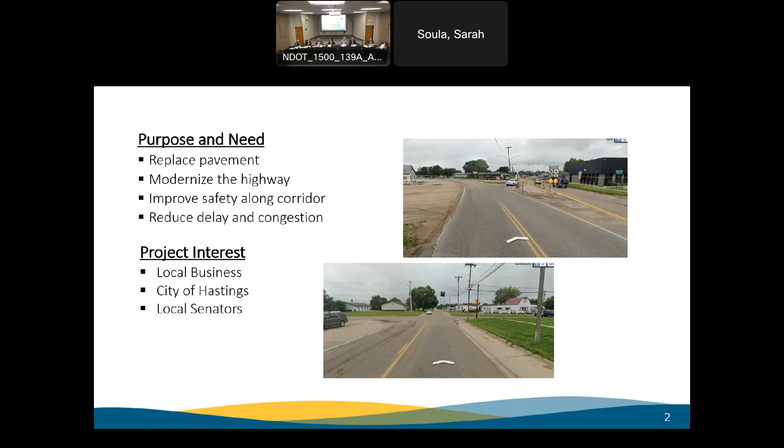So as we step into this, some of the key activities I want to talk about that have occurred recently is a public meeting. I start off with this because that's our biggest step that we've done here as of late. It's taken us a little bit to get to this because we did have to take a step back in the design and in working with the city. Since it is a first-class city in nature, that means there are over 5,000 people who live in Hastings.

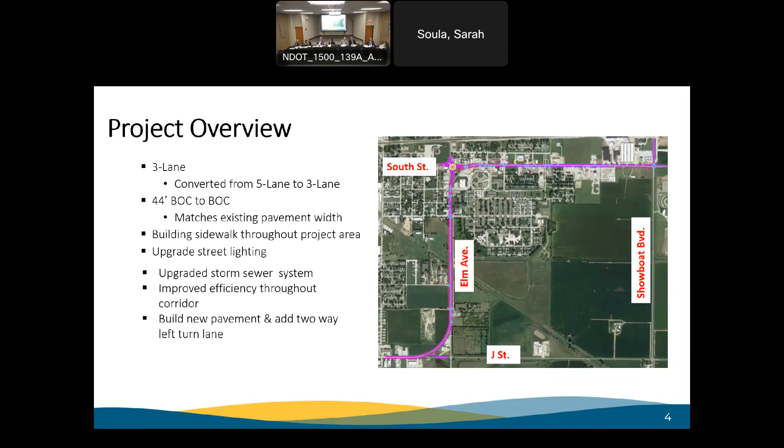There is a Good Samaritan community there that is assisted living for the elderly. That community was very interested in the public facilities along this corridor. Currently, there are very minimal sidewalks along this segment of Highway 6. This project will build continuous sidewalks for them. In my conversations with them personally, we had quite a few of them show up at the public hearing, and just understanding that we'll have sidewalks and curb ramps, and that they have this curb section along with this buffer zone, was very reassuring to them for their mobility. Driving through the project, they are a very mobile community.

You'll see them crossing and moving about, and so this is important for them to have access. It was a very good key thing that they learned about and were able to reach back and understand that with us.

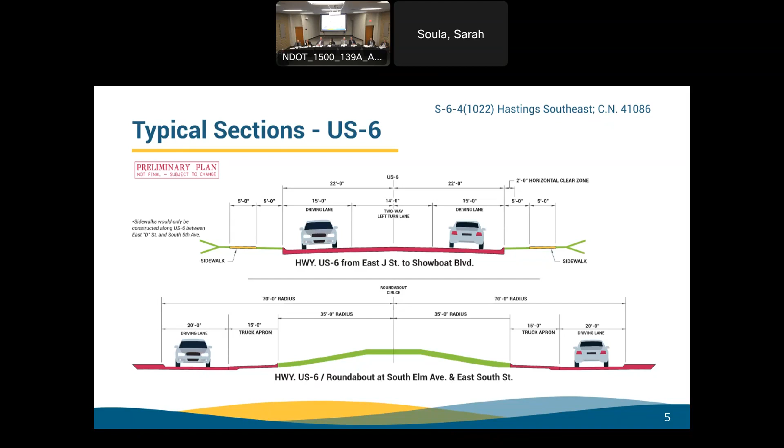Traffic-wise, part of our evaluation going from a 5-lane to a 3-lane was traffic analysis, to make sure we're meeting the needs and operation of the future. Traffic in this area is projected to be very steady, with some exceptions to the east half of the project. Outside, we do have some industrial growth going on that shows vehicles will continue to slightly increase over the next 20 years.

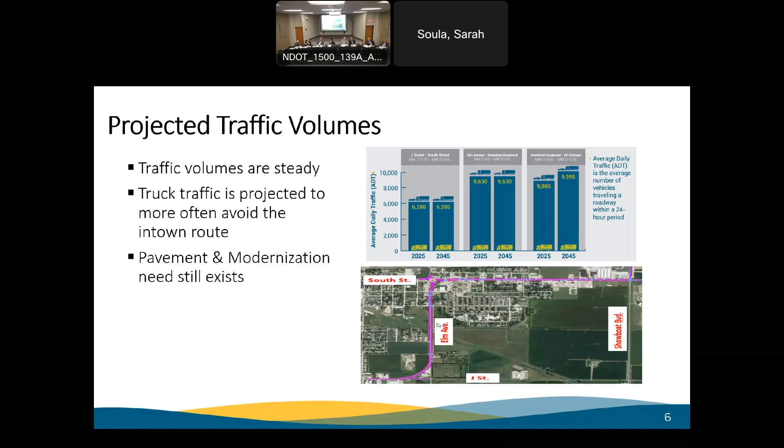That truck traffic is anticipated to utilize Showboat Boulevard and Showboat North. As far as the project itself, we still need to move forward with it to make sure we are meeting and modernizing the sections and the pavement. So we still have that driving need to do this, even though traffic is steady.

The city and the state also participated in funding to improve that section. We are slated to use it, like I said, as a detour, but there's a lot of conversation about trying to get trucks over to this on a permanent basis. Right now, since it's a county road, we're making our facility access for trucks easy and fluid, and we'll talk about some scenarios why that is. But right now we don't require trucks to use it because it's not a state facility, so we still design Highway 6 to meet all the trucking and traffic needs.

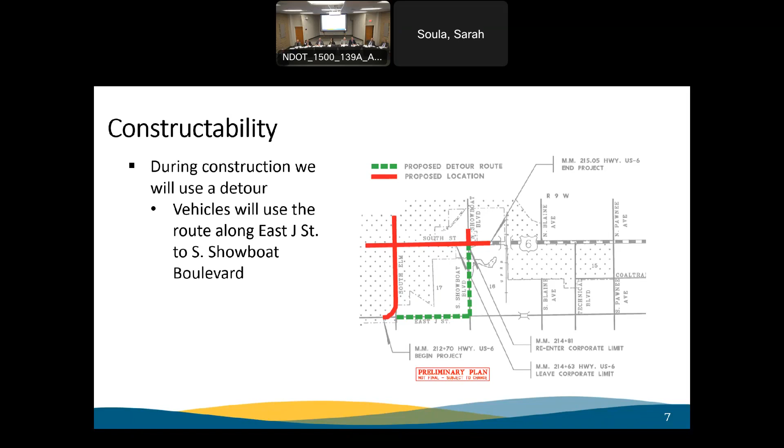So we would move the intersection back over to more of a traditional location where you see it today. In first analysis, with a standard T intersection like you'd normally see in a roadway, the functionality became a little less operational once we went from the 5-lane to a 3-lane. That's because all the through movement of Highway 6 has to turn and go left or right, depending on which movement they're making, and that turning movement poses a lot of phasing obstacles for green lights and red lights, so traffic pauses for a considerable amount of time.

With a roundabout, we get the efficiency to not only slow the traffic but have a more continuous and efficient movement. It also provides safety aspects the public was interested in, like refuge for pedestrians within those medians. This configuration is much less than dual turn lanes, so the footprint is smaller. We were able to shift it towards the southwest, away from the Duncan ball field, which is very important to the community, so we are limiting impacts to the ball field itself, essentially avoiding them entirely.

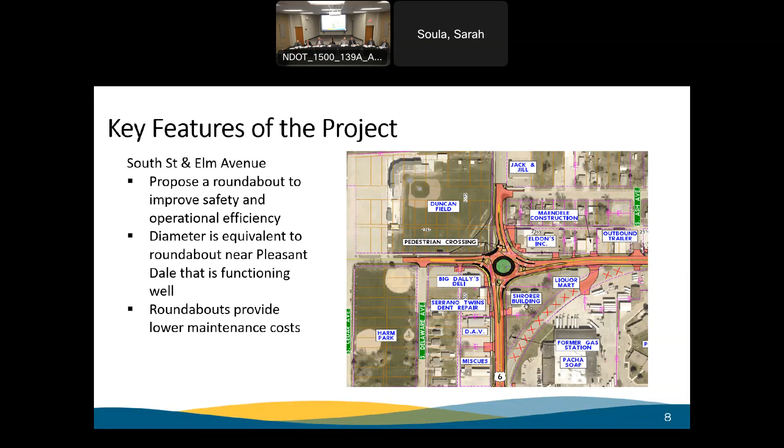So if you add the efficiency that they give plus the safety benefit, they are great tools for us to use at certain locations.

We also wanted to let them know that this isn't our first one, and everybody knows that. Some people are not familiar with them. Part of this is educating people on these, giving them a chance to go drive them across the state themselves versus just hearing about them. This one happens to be right outside of Lincoln at Pleasant Dale. It does handle large trucks as they move through it. And so we kind of referenced this for them, but then we also referenced several others throughout the state so that they would understand what occurs during this movement.

And as we showed this to them, obviously a lot of people paid a lot of attention to it. We have a lot of industry in that area that drives trucks, and so they are interested in how they function, just like every other community.

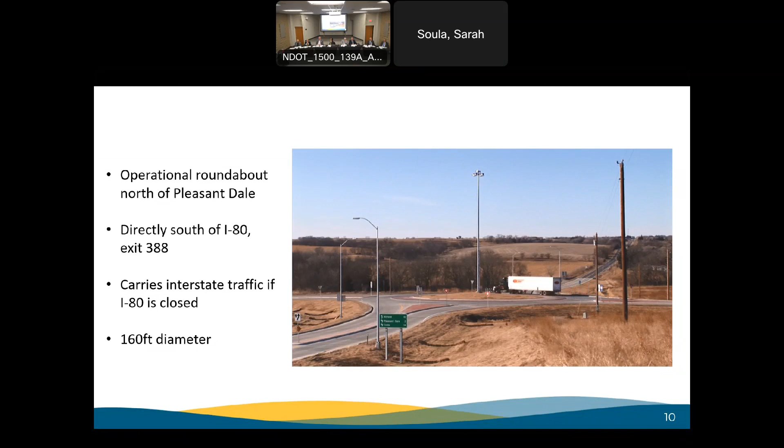We provided them with this, which showed them also those other locations throughout the state. So we have more than this out there currently, but this was some of them that we built over the last 15 plus years. And so we have some historical data that we wanted to share with them.

I'll take you to the right side of the slide where we talk about the crashes. In general, what you're seeing there is some pretty significant impacts to those areas. These roundabouts were put in not only for operational needs, but also for safety. If you look at the total crashes over the last 3 years and you tally up the before and after, you're seeing about a 50% decrease... instead of that national level of 35%, for these locations we're seeing about a 50% decrease in total accidents and about an 80% decrease in serious injury accidents. And so that's a great benefit to all of us.

And so again, this is just a chance for them to understand why we need these out there and why we think that this is the best, most efficient, safe use of that intersection in Hastings.

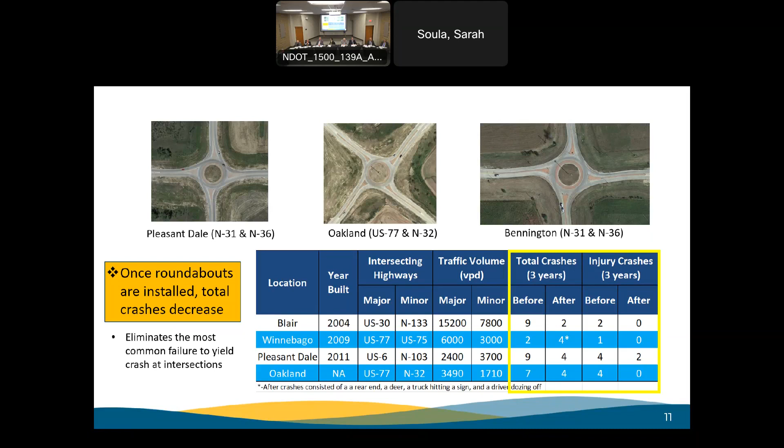The other part of the conversation where we talk about with the city and the community, there is a group within the community, Hastings with a Voice. They had reached out to us a couple times to talk about first the concern of the roundabout that we just got done discussing, and then second with obviously this intersection that's shown in red.

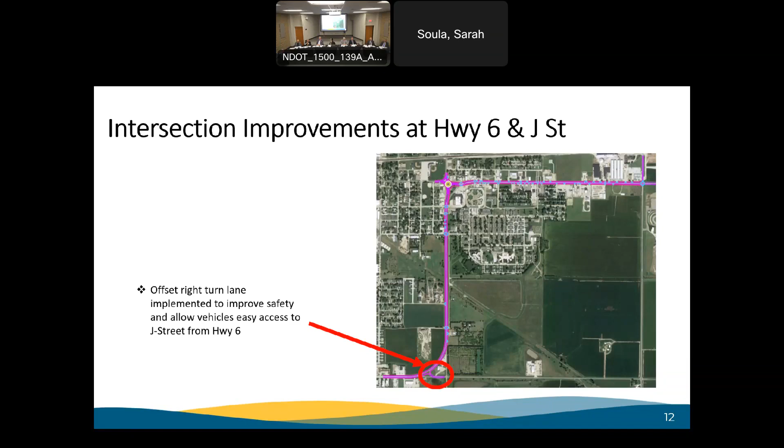Those two conversations have evolved over the last year. From my opinion, I believe the concern with the roundabout that is there currently, they have an understanding of that and are accepting of that. A lot of their questions now are saying, should we build a roundabout down in the southeast corner or southwest corner where the red dot is now too? So we have analyzed that, and we want to step into that more as far as looking at what we are doing there now and what we believe is the most efficient use of city funds, state funds, keeping this safe and operational.

So currently what you're seeing is that in this particular intersection, it's slightly different than what we're seeing up north. Here, the through movement doesn't have to have a right turn or a left turn like up on the north intersection. Here, the through traffic has the ability to maintain a steady flow, so we don't have that operational turning movement that would cause a lot of delay. Here we have basically a J Street connection that we are moving over to be more centralized with the curve so we have better sight distance.

We are currently proposing a transition out of that 5-lane into a 3-lane, utilizing the outside lane as a free turn movement for trucks and others to get onto J Street. We are providing then coming south with that 3-lane, a turning movement to come onto it from the north approach. The movement that is the conversation is the trucks coming around and having to get over onto Highway 6.

Traffic has continued to analyze this, and we continue to in the future as well. With what we see projected and what we've seen today, right now by putting in a signal, we would actually add delay. Trucks right now have the ability to come up, stop, go. Adding a signal would cause them to stop if they had a red and wait through that signal. So again, from an efficiency standpoint, it is operational very well today. This will be even a better operation.

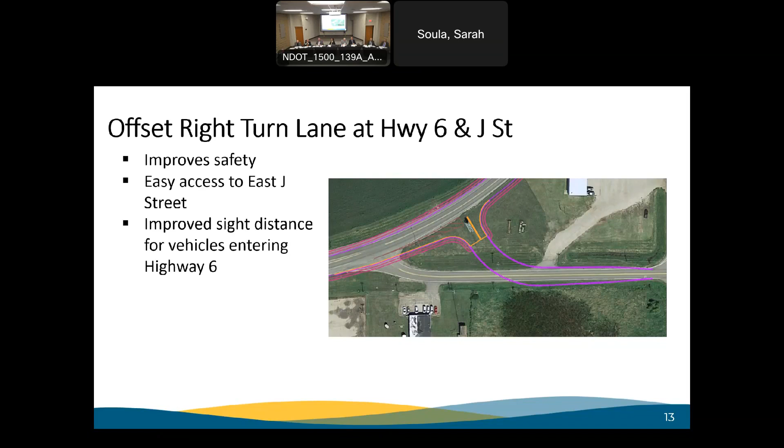So the conclusion of what we presented to them was really just the overall implementation, the safety, efficiency of the roundabout, and why we need it at some locations and other locations we don't.

I believe we had a very successful public meeting. I believe we've had good positive support over it. The city's here today, so I believe we have good city support for it. Again, we are addressing the safety concerns, the modernization of this area, and we're improving the ability for the trucks to not only utilize our facility, but also to utilize the East J Street facility as well. We are excited to get this out the door, and I believe the city's excited for it. I believe that all the public is excited for it to come. It's been a while since we've had the opportunity to say we're getting close.

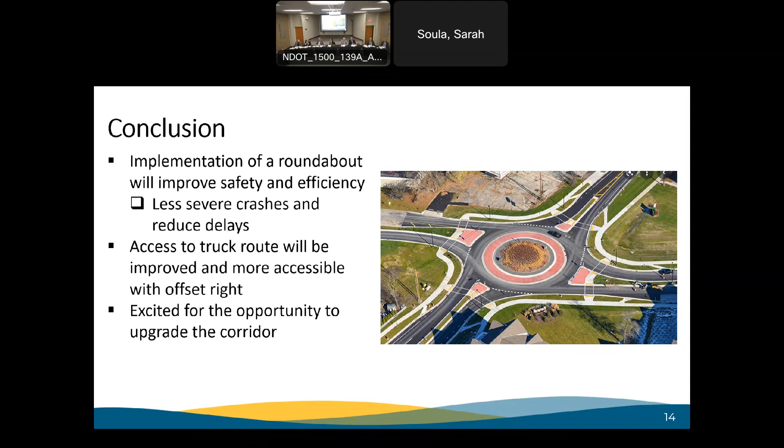So what does that mean? The reason I'm here today is not only to update you, but we did come here in 2017 to ask for corridor protection or access control. As we do access control along a project, we're consolidating driveways. So we basically have safer movements where driveways are lined up versus where we have people coming and entering at more of a free will.

We did that back in 2017. The commission did grant that. So we've moved forward with the design on that. Reviewing what we did back in 17, the resolution that we received from the commission appears to cover the same as we have today, other than the fact that we have a 3-lane section versus a 5-lane. So we don't believe we need any action from the commission at this time.

And so we were hanging on to this and wanted to represent that we had brought that to the board already a few years back.

Our timeline: right now we had that public meeting in July of 23. Design is now progressing and will continue all the way up to the point where we let it. Our right-of-way efforts will begin hopefully next spring.

There are a lot of right-of-way acquisitions and impacts along the project, but those are somewhat minor compared to others. We have a lot of sidewalk to build, and acquisition of access control, so as part of the right-of-way item we'll be dealing with everybody along this corridor, which takes time. That right-of-way acquisition will carry us into basically the fall of 25.

That fall of 25 is when we anticipate the letting of the project, and the main construction will then begin in the spring of 26. In that period from letting in fall 25 to that spring, there could be some other activities occurring, such as utilities.

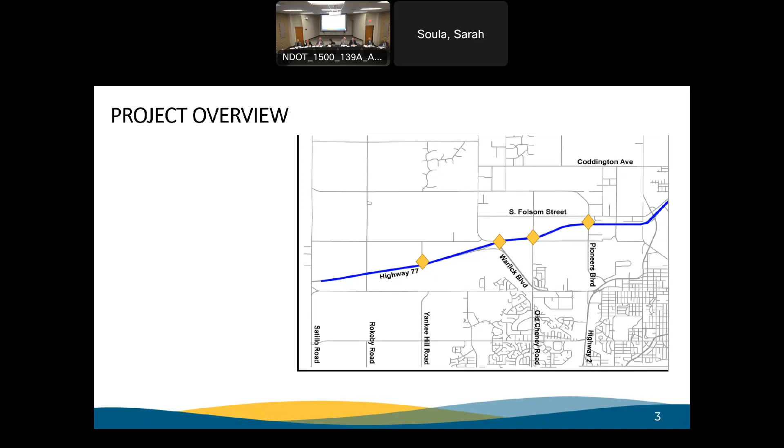So the 4 intersections on this segment are: one, the simple one is Yankee Hill - today it's just a T at-grade, and that will be closed, similar to what we've done on Rokeby. But the 3 major ones - Warlick, Old Cheney, and Pioneer - those signals will be removed. My next slide is going to talk about what we're going to do there.

Now, we don't have the right geometrics for you to look at because we're still in kind of a concept phase. We hope to have concepts done here soon and vetted, but in a very high altitude sense, we have the no-build option, which is our baseline.

That's what's out there today, three signalized intersections. And then four other alternatives that we're considering hard. Of those four, we're going to have an interchange at Warlick for sure. That's a commitment we've made.

So there will be an interchange at Warlick and 77. We've got some development in that area with the new casino, it's been upgraded. City of Lincoln is also doing major infrastructure work at 14th and Old Cheney that will impact this location.

Then when we start talking about Old Cheney and Pioneer, we have a range of options, kind of a bucket list, a what-if-then statement. Right now, we have an existing NEPA document, and it describes option 2.

So that's where we'd really like to start: an interchange at Warlick, an interchange at Pioneer, and then a full closure of Old Cheney with roundabouts. So you would have no direct access to 77, and you'd have no way to get over 77. It would be closed.

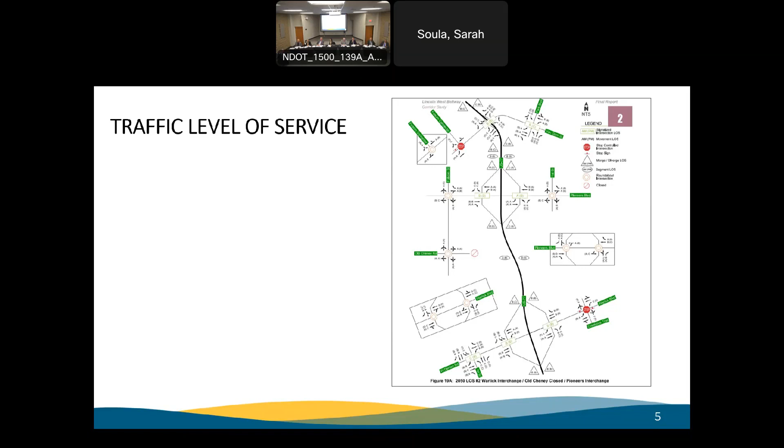Our next steps: the corridor study has been completed. Why I'm not showing you any of these concepts is they're really in progress right now. We just restarted this job here in '23 with new signed contracts with our consulting partners, and really wanted to get South Beltway tidied up before we put a lot of focus on West. So we're dusting off a lot of information. Hope to have that range of alternatives to us here in the next month.

On that, what we want to do is take the outcomes and look at the operations, look at the environmental impacts. That's going to be a big step on knowing what are we doing to our environment, our agency partners, to help us make a decision on where to go. And then obviously cost is going to be a factor. Put that all into a matrix, probably a weighted matrix.

Arrive at some proposals that we feel comfortable enough to take out to the public, in a re-kickoff meeting, but also with enough homework that we can articulate what we think a preferred solution is, but not far enough that we can't absorb and listen to comments and adapt to community comments.

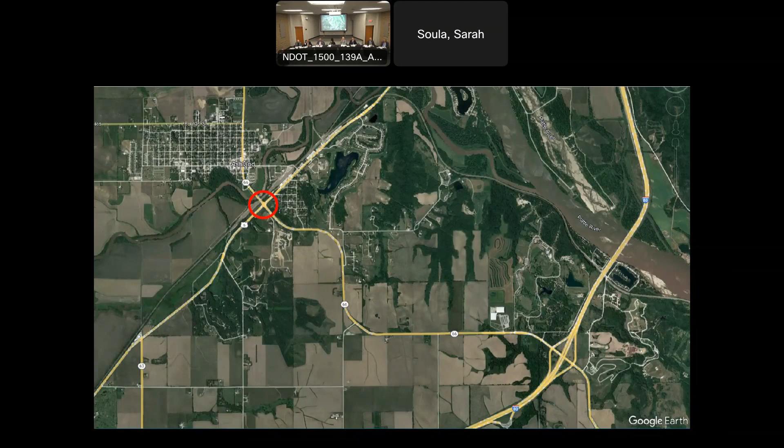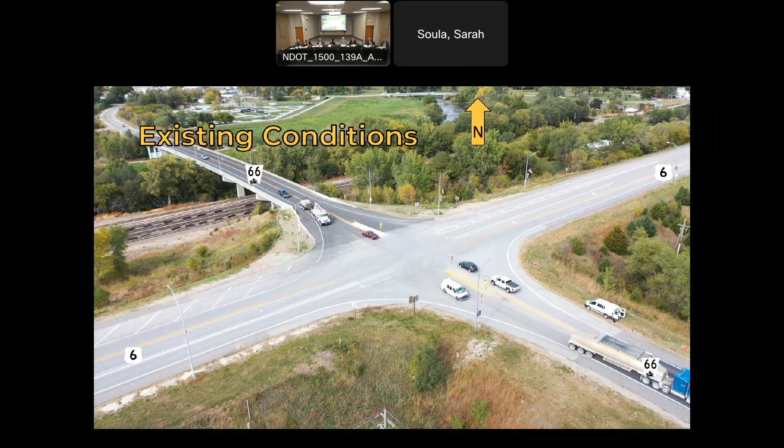Existing conditions in Ashland: Highway 66 is stop controlled. Ashland is up to the north there. It's a pretty wide intersection, which helped us out with this project.

A little background on this intersection: in 2006, Highway 66 was rerouted from the south to construct a 4-way intersection here. Prior to that, Highway 66 snaked through town to create another T intersection a little farther to the east. In 2019, from March to July, we had a temporary traffic signal in service here because of increased traffic detour routes from the floods in the spring of 2019. And in 2021, we proposed a modular roundabout to the city.

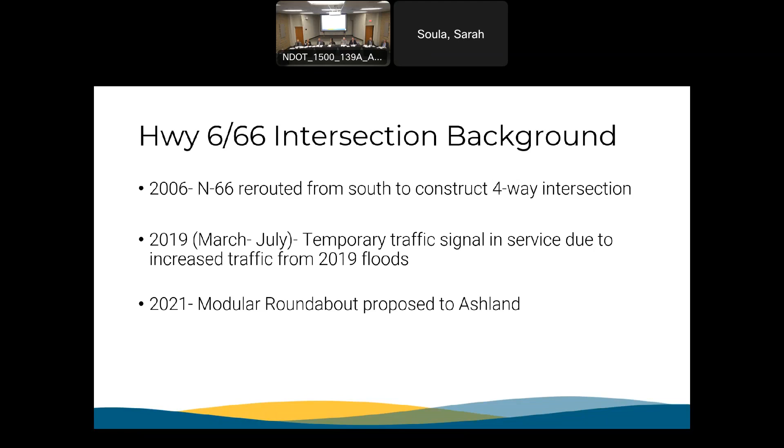Some other additional information on this intersection: because of traffic volumes on Highway 6 and the access points to town, we saw some operational issues from people trying to leave town, and there were safety concerns with some right angle crashes at this intersection. So our task was, can we install a roundabout here using temporary traffic control devices?

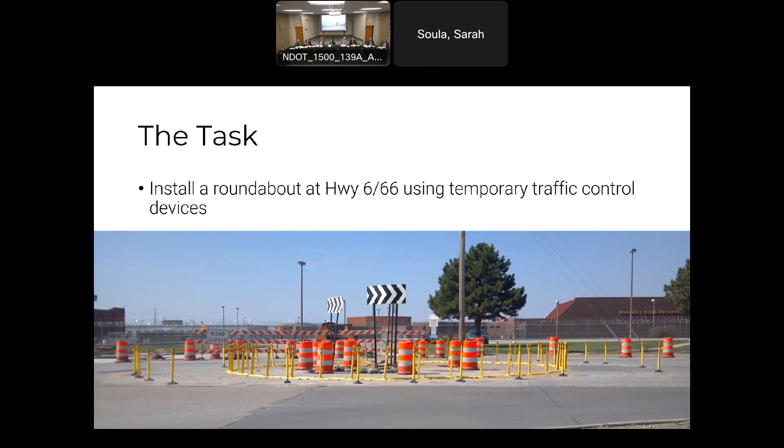This picture is from 2012, just south of our office at 14th Street and Pioneers. There was a reconstruction project down there, and a temporary roundabout was built to control traffic through the intersection and help with the phasing of construction to the south. This was our first look at this. It functioned really well through this project, but we didn't feel these devices would hold up for the period of time we were potentially looking for. A couple months during a project when a contractor is on site every day is one thing, but we didn't think this would really function for a longer term.

So we started looking at other options. What else is out there? What else can we build this roundabout with? Most of these were eliminated just because they couldn't do what we wanted, purely because of size. These three here would work if you want to build a little mini roundabout for a neighborhood, but for the size we were looking at, they were essentially eliminated.

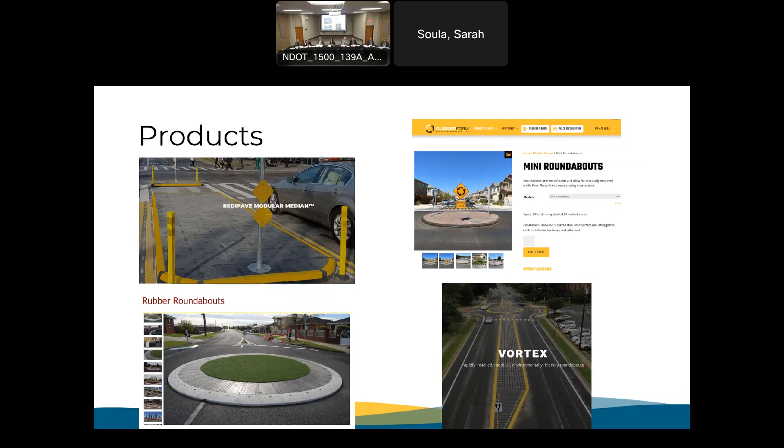The one product we did go with was this Vortex design in the bottom right corner. They had the flexibility with their product design that was going to allow us to do what we were looking at doing. Working through that process with the company, we came up with an original concept just to see if this was going to fit in the intersection - is it big enough that we can do this without a lot of widening or grading, something that wouldn't get us into a lot of permit issues with building this here.

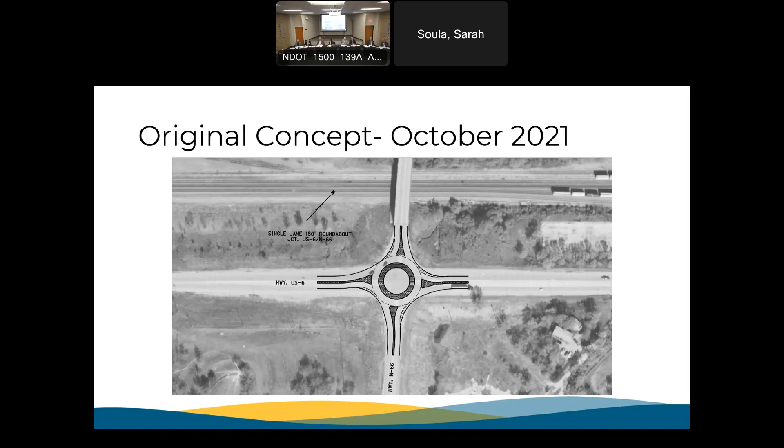As a common theme this morning, this is essentially the roundabout that's at Pleasant Dale. The Pleasantdale roundabout is used a lot for us because it has truck traffic, as Mick mentioned, and we know it works. So this is something we can take to the community and say, we know this is going to work because it works right here, at a similar size.

For community engagement, in October of 2021 we met with a few city officials from Ashland just to introduce this topic. They've brought this intersection to our attention several times, and we wanted to see their thoughts before going any farther. That meeting went well, so we went to the city council in November of 2021. One thing we asked them for at that meeting was a resolution supporting this project, because for us to go farther, we wanted a good feeling that they were going to support us with this.

So that led to what we called the Ashland Pilot Project. This project was let in August of '22. We gave this project 45 working days. And that was important with anything we did here.

Over the last 10 years, we've been in and around Ashland several times on Highway 6, on 66 through town. They had a project on Silver Street. There's been a lot of action in Ashland. We didn't want to do anything that was going to close something again just in this short amount of time. So 45 working days, pretty quick project that we could get in and get out.

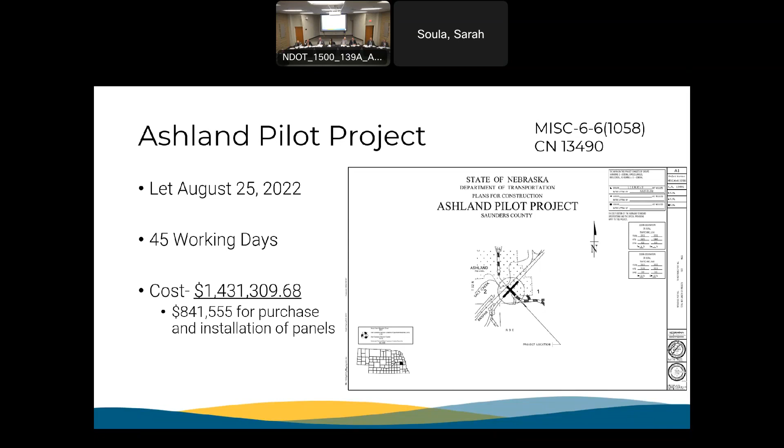This is a design that went into the plans. As you can see from here, it's essentially what we had in that original concept, with a few minor tweaks. This project was designed like we would design any other roundabout. We had the same considerations: how are vehicles getting in, turning movements, what speeds are these curves designed for, really similar to anything we would build out of concrete.

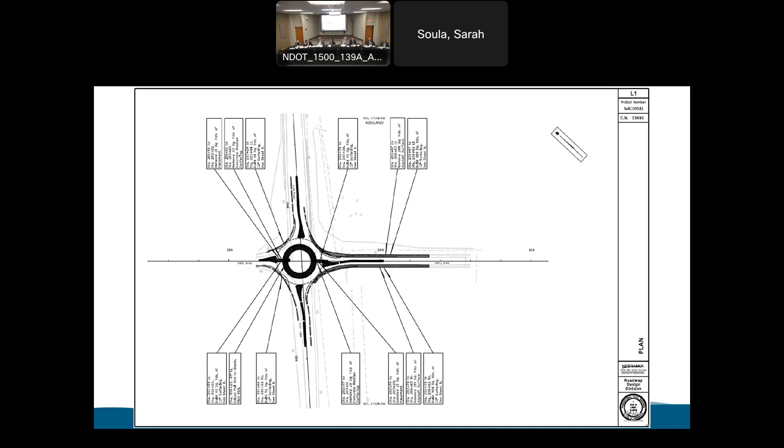So in the middle of June this year, these panels showed up on the project site. The really interesting thing with this vendor is they start with a panel that's 14 to 16 feet long. They're a foot wide and about 2.5 to 3 inches thick. The material is the same material that the railroad uses right now for their railroad ties. So it's a composite material, with about a 50-year design life to it.

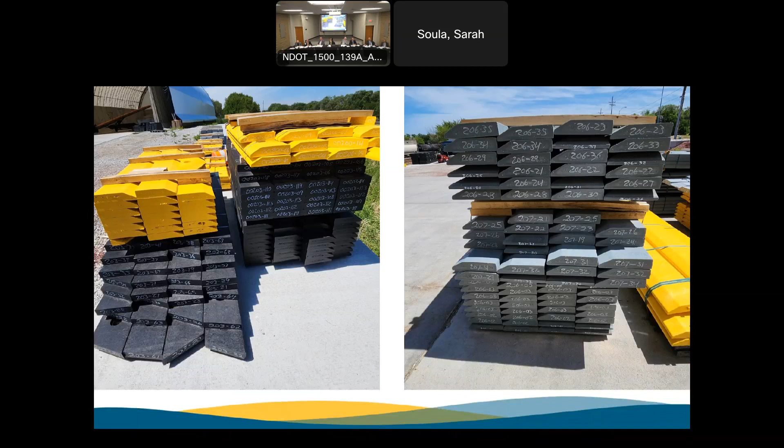But these panels all come on pallets. They're all individually numbered, and it's like putting together a puzzle. You can see on the end here, every piece has a unique number, and that has one spot in that roundabout where this is going to go. There's no cutting on site, no drilling of holes. You find the pallet these are on and start laying them out. The pallets are all set out, so you're not going through 20 pallets to find your one panel that you need. The panels are set out or grouped together based on where those are going to go.

One question we always ask people when we're looking at new products is, how does this work if a snowplow hits it? How does this work in the winter? But with this movement here, that gave us some good feeling that it was going to work with where we're at. A couple of the initial installations of this product were up in Canada, so they have the same issues up there that we do, and that gave us good reassurance.

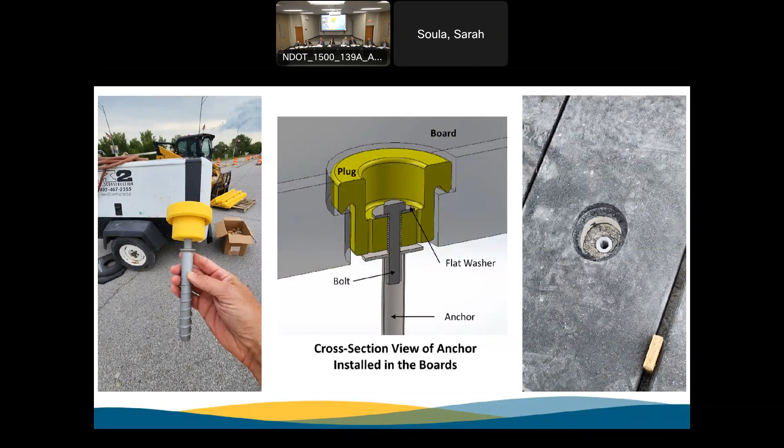Here's a couple of pictures of when the installation began. I believe they had a 4-man crew doing this: one guy drilling holes, one guy blowing the hole out, and then they epoxy the anchor in and put the bolt in and tighten it down.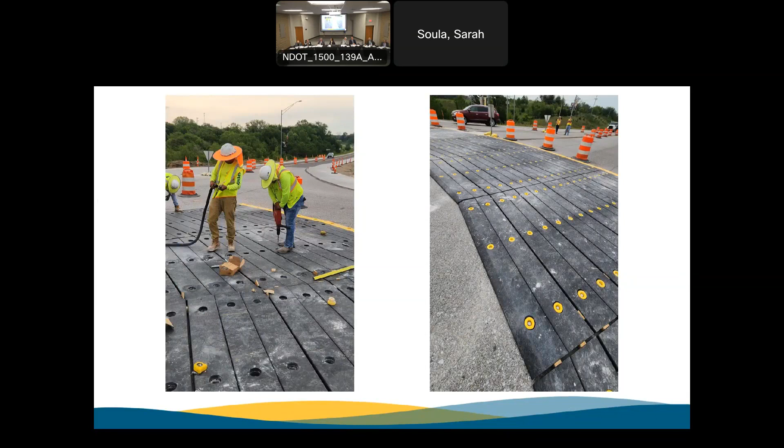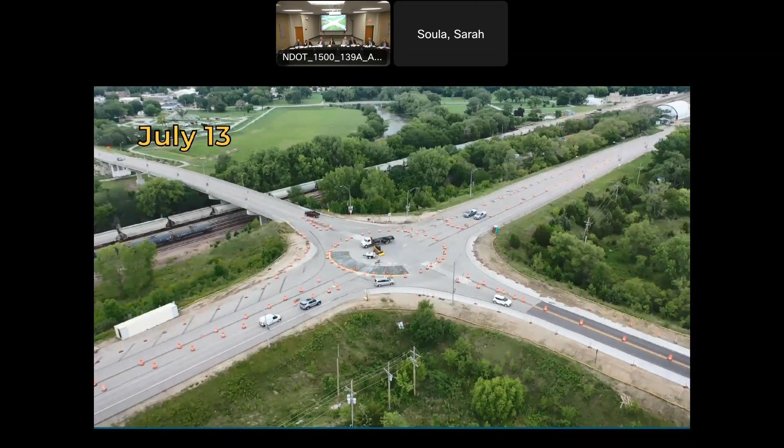All right, now for the cool things, the videos here. This was July 13th. I believe the panel installation began the day before this. It's a pretty fast-moving operation. The really cool thing about this video is from this point on, this intersection operated as a roundabout. So stop signs are pulled from Highway 66, and the traffic on 66 has equal access to the highway, just like everybody on Highway 6 here.

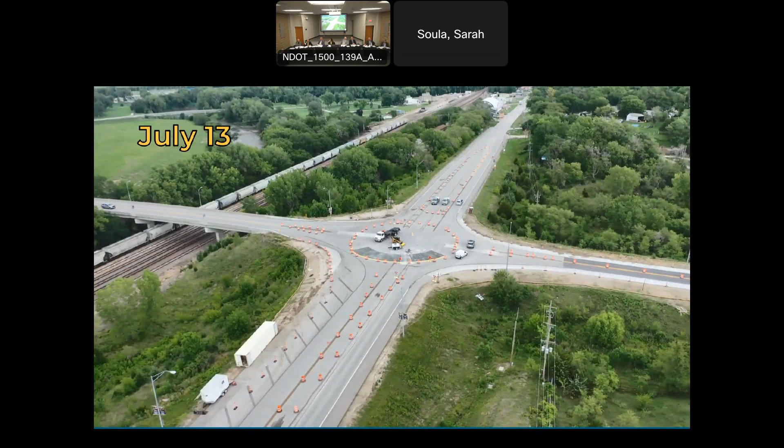Forward that 5 days to the 18th of July. The center circle is complete now. You can see the guys are still up there installing the anchors for it, but everything's laid out in just a matter of 5 or 6 days. There's guys working on the splitter island on the south side of the intersection, laying that out and getting ready for those to be fastened down.

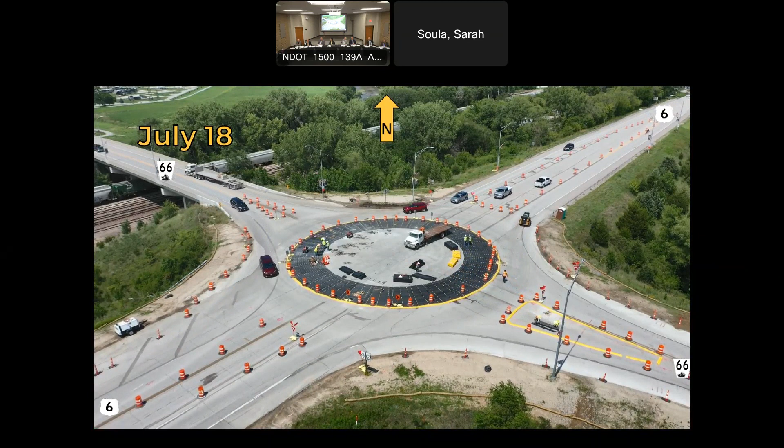You can tell through this intersection there's a lot of truck traffic. Because of the quarries in the area, there's a lot of rock trucks that come through here, along with other trucks. I know one morning we were standing out there and there's a truck from a chicken plant that comes through about 8:30 every morning - that is not something you want to witness, but it was consistently 8:30 every morning that truck came through.

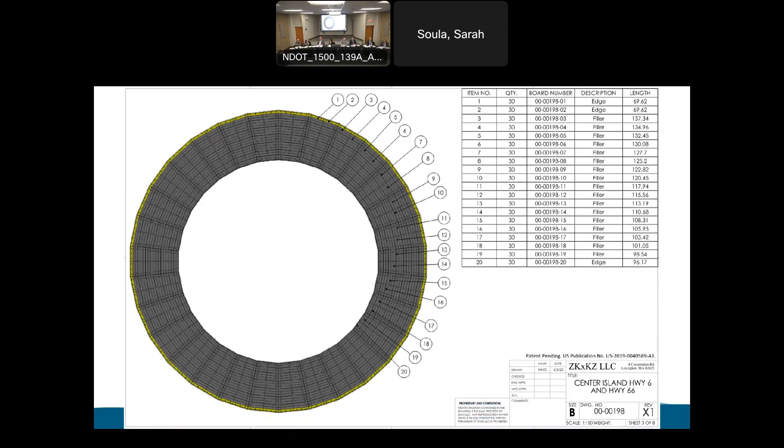So what's next with this? We're going to monitor this over the winter, see how it works, watch the operations, reach out to our guys - what do you think about plowing snow around this? Look at the design details, or if there's something we need to do differently. Do we need to add more delineation in here, or do we have too much? And then look for additional sites. This intersection had a really nice benefit because it was pretty big already and didn't require a whole lot of other work, but we're always looking for other sites where we can do something similar.

So, any questions? Any questions by the commissioners? Hearing none, thank you very much. Very informative.

We've been hearing about this project since before we even put up the temporary traffic control measures after the flood. I remember going out to one of the Rotary meetings in the morning, and they were very determined that a signalized intersection was the only thing that would work. Hearing the communication that's come out over the duration of the project, it was a quick installation, so people very quickly were able to see how it would work and see a community get around an idea. I mean, there's still some naysayers.